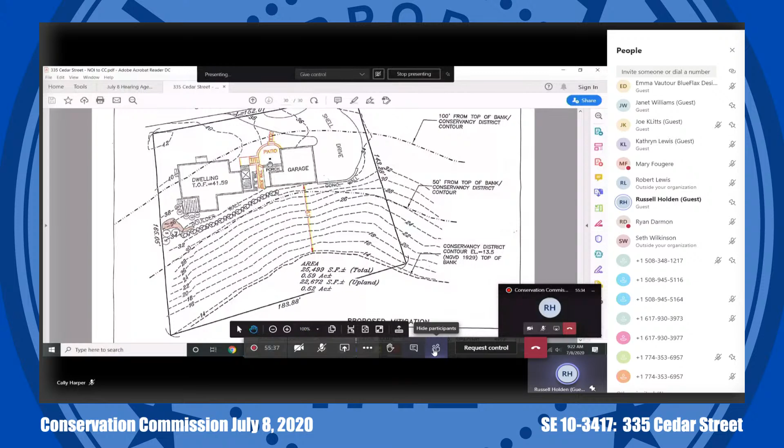Janet, I have a question. Okay, go ahead, Bob. There's a drain within the cobblestone patio, where does that drain out? It goes to a dry well. I'm not sure exactly where, but I've been told that it goes to a dry well within the patio. Yes.

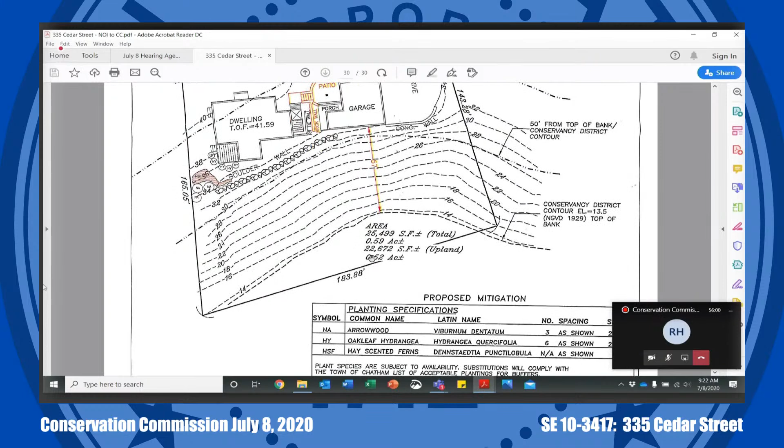Okay, and I noticed some viburnum on the bank, on the 50-foot bank. Is there any way you could add more viburnum to that area? That's what we were just talking about - as far as this notice of intent, are you saying below the boulders or on top of the boulders? No, below the boulders on the bank itself. That's what I proposed, but I was told not to include that in the mitigation.

Okay, that's the previous restoration area. We're trying to stay away from the previous because we don't have those plans. Okay, terrific. We'll hope that the viburnum will continue to grow and will eventually fill in - if it's anything like the viburnum I have here, it will spread and grow and fill that in. That has grown a lot since this fall. Good enough, thank you.

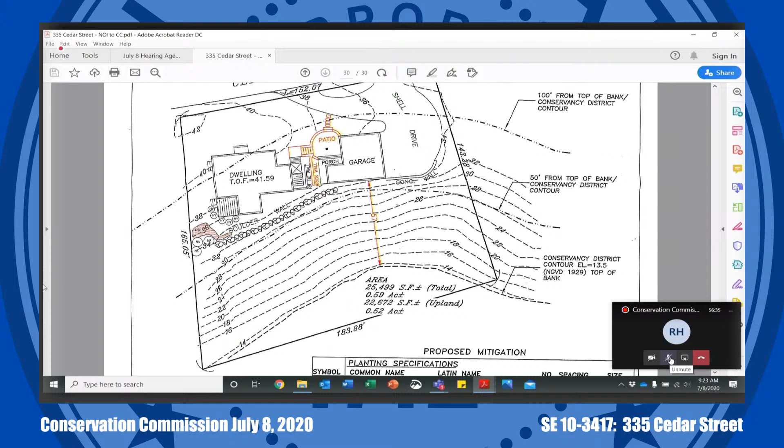Other questions, comments, suggestions? Everybody comfortable with sending this to the work session for an order of conditions? Yes. Okay, yay, good to hear you, Joe.

So we have a motion, same as before: continue to the August 5th work session to review an order of conditions. Bob Lewis moved to go to the August 5th work session for orders of conditions. Is there a second? Clark, second. Roll call vote to continue to August 5th. Commissioner Klitts? Yes. Mr. Lewis? Aye. Commissioner Delvecchio? Aye. Mr. Clark? Aye. Chair votes aye. Let's continue to the August 5th work session.

Thank you, Russ. Thank you very much.

Okay, next item on the agenda is 74 and 77 Sears Point, Patrick Brogan and Patricia Black, SE 10-3418, proposed construction of new driveway to existing guest house, implementation of a land management plan for invasive species control at 74 and 77 Sears Point, Assessor's Map 11A, parcels 10B and 11.

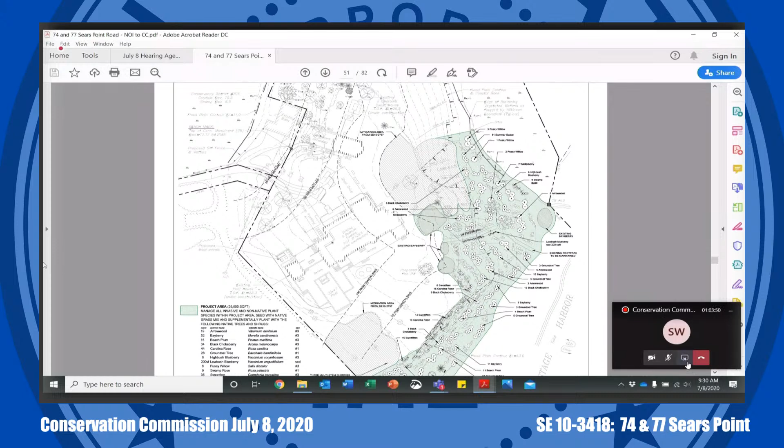When these black cherries and oaks grow up and get into a very unstable form, they are subject to wind throw. Black cherries in particular tend to grow more laterally in these high salt areas, which shades more of the ground cover, eliminating a lot of other growth that would otherwise be in that location.

Black cherry in particular puts out a more dense root system, helping anchor it to the ground and prevent wind throw. Also, you're just reducing the overall sail effect of the tree, lowering its height.

We would propose to manage it at about 8 to 10 feet, which is a very stable height and allows considerable growth and development of fruiting bodies, and should ultimately allow that plant to last much longer in this high energy, high wind, high salt spray location.

So to be clear, we'll get this corrected and sent over later today. It's 6 to 8 black cherries only that are proposed to be coppiced, because we've identified some major structural deficiencies with those 6 to 8 trees—not 16. We'll correct that.

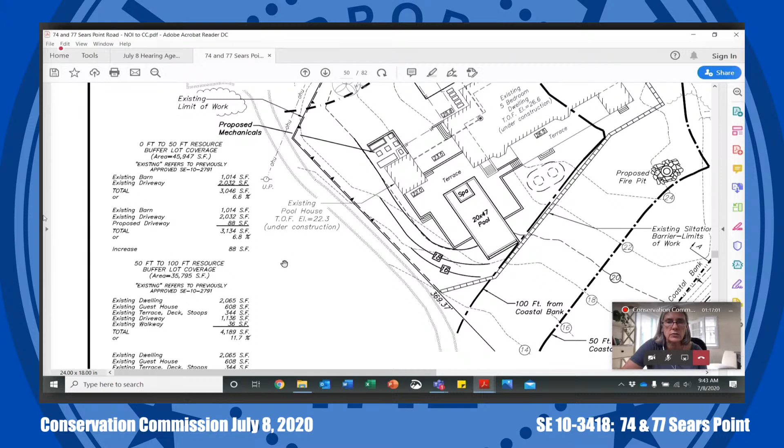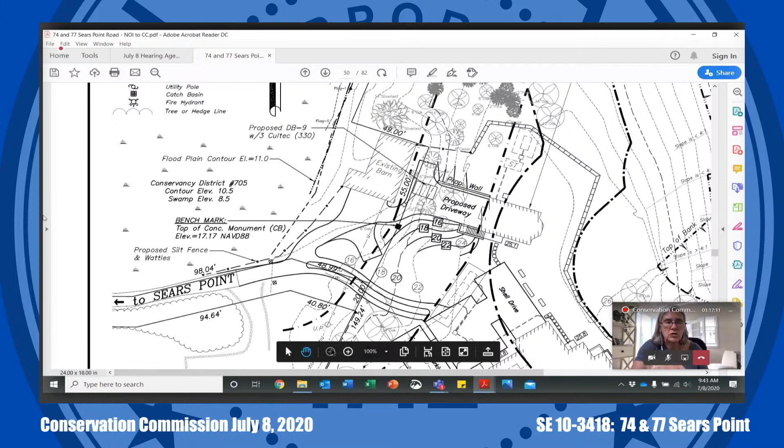Okay, all right, great. So the 88 square feet, Callie can you scroll up a little bit? The 88 square feet of increase in the NDZ is where the driveway, up a little bit, yeah, the driveway crosses from the spur off the existing barn and comes up to the house. Is that right? Yes, yep. Okay, and then an additional 1,800 square feet in the 50 to 100. Is that?

So altogether, it's about 1,900 square feet of impervious surface.

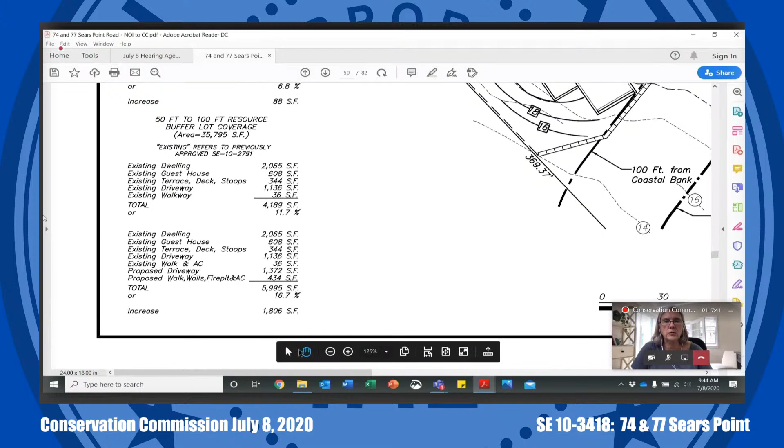I'm interested - you said the proposed driveway is going to be pervious, but I noted in the work protocol that it's calling for two underlayment layers of asphalt. I honestly can't say I've seen this before, so I'm wondering what that is and what impact it has on the ability of the driveway to act in a pervious manner and filter stormwater.

I will check with the landscape architect. I know we proposed that for the main driveway because it's relatively steep. I don't know why it was called out for this one, but I will find that out.

That was one of my questions, because I don't have the original plan, and the original driveway isn't quite available to me easily. So that method being proposed - is it approved for the main driveway? Yes, two courses of asphalt are not proposed over... that wasn't what was proposed for the entire main driveway. It's just the area where the grass strip goes up the hill. Everything else, I believe, was - but I'll confirm that.

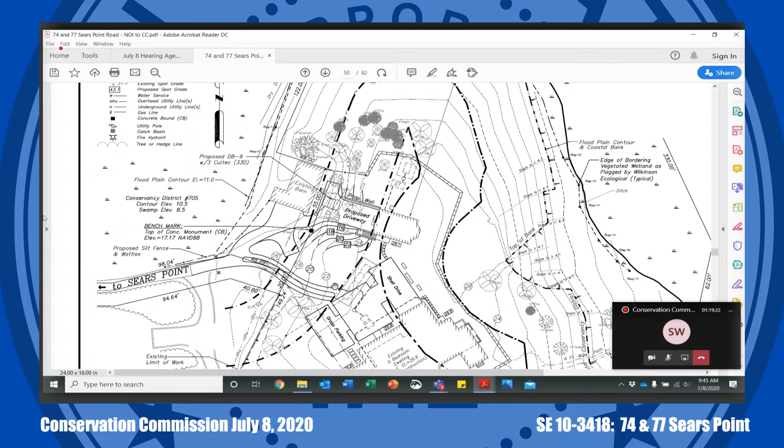Other questions from other folks while I'm double checking my notes here? Other commissioners, questions, comments? Bob Rawls.

Yes, a bunch of questions, but I think they should probably wait for the on-site. Is the barn being removed? No, it is not.

And whenever we finally figure out which parts of the driveway have this asphalt and which parts don't, I think it should be marked on the site plan so we understand that.

I have a bunch of questions about the grading required to put in a drive from the barn to the guest house, because at the moment there are steps and a retaining wall there since the slope is pretty significant - but that's probably best answered on site when we're standing there looking at it.

Can you clarify, David, the trees that are proposed for removal? I know you said there are 5. They are not marked. So can we have them flagged in the field? Can we have the trees proposed to be removed marked on the plan?

Yes. And I guess a tree inventory is what I'm asking for - a list of the trees, their size, their species - so that it's clear which trees are coming out. I can do that.

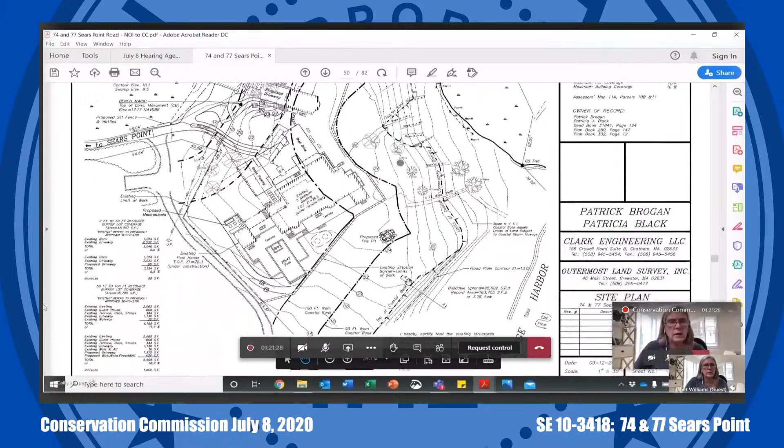Callie, if you can go back to the site plan please. David, you provided 4 profiles, and only one of them is shown on the main site plan - that's AA. If you scroll down, or maybe up, where you get to the 4 profiles shown, the 4 cross sections, AA through DD - there we go. I was trying to understand.

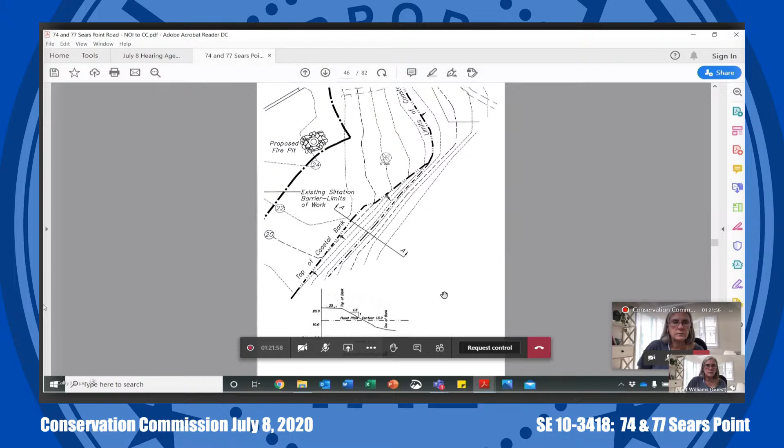So AA is marked on the site plan, that's the coastal bank just below the proposed fire pit, and I can see the slope there. But the other 3 are not - their locations aren't shown on the plan, so it was a little hard to tell what they were. Well, I did provide location sketches along with the profiles - I figured that was sufficient.

Well, this one I can tell, BB, a bit, because it's showing the proposed fire pit. So this is just showing how the slope of the bank begins to level off as you move in an eastward direction away from Stage Harbor and over toward the wetland.

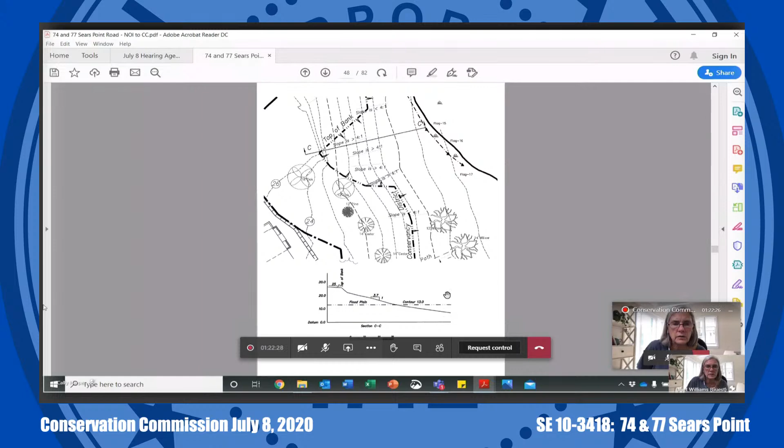Okay, I see that. Then Callie, can you go to the next one, just so I'm clear? This is CC - that's off the east side of the main dwelling, heading toward the ditch. Okay, and the last one, Callie.

That is to the east of the guest house, again heading towards the ditch. Okay, all right - I just was confused, I wasn't sure about where those last 2 were actually located. But I can easily add those to the site plan.

Thank you - you've also asked for the trees to be marked. All right, other questions, comments?

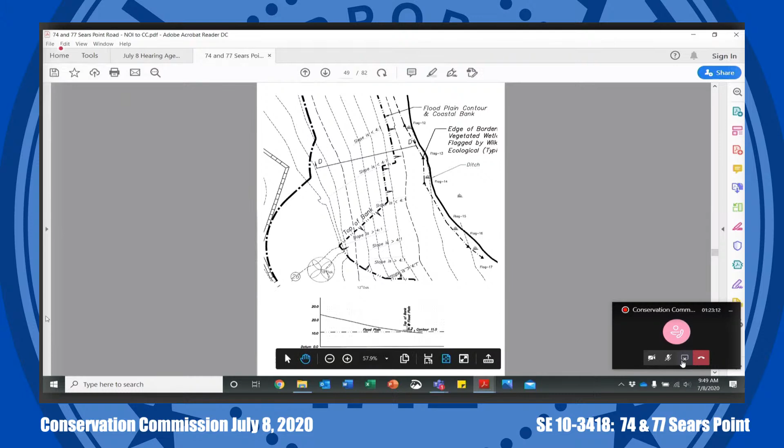So I have a question for both of you. Seth, you mentioned in your narrative that part of the reason this project is being done is because of significant erosion on the coastal bank. Yet the project narrative also says there's no visible sign of erosion. From my familiarity with the bank, I haven't noticed any significant erosion.

Is there areas of the coastal bank where erosion is more of a problem? Yes, far to the east, on the other side of the creek, and along the neighbor property to the east near the rock revetment, there's some active erosion. What we're trying to communicate in the land management plan is that the deeper rooted native species proposed here will do a much better job preventing erosion. We don't feel structural elements are needed, simply a native plant community, given the slopes and the fact that most of the bank is presently stable.

We're trying to prevent that active erosion from encroaching further onto the property. So it's largely preventative in addressing erosion problems—get the deep roots in now rather than having to use something like fiber rolls or sand-filled envelopes later. Okay, got it.

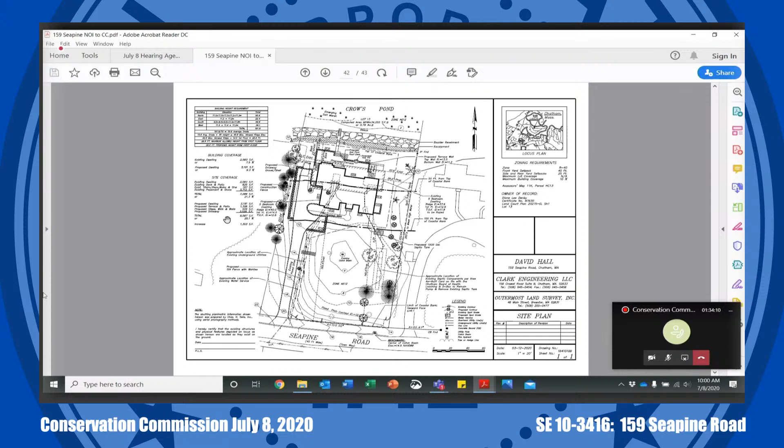Madam Chair, we also have Emma Vauteur of Blue Flax Design, who's working on this project. I don't know if you want to hear from her at this point or not. Sure, let's get a full picture of the proposal, and then we can.

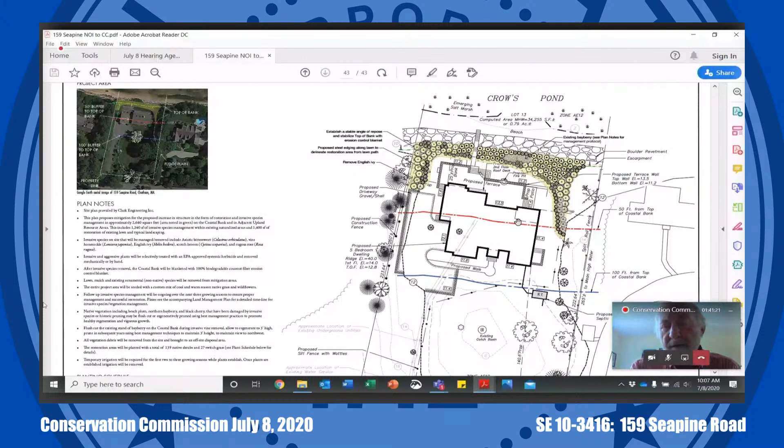Well, to some degree, but we have to be- it'd be good to be a little more specific about where that view corridor or desired view corridor is by showing it somehow, I guess, on your plan, on your landscape plan. I think there should be some indication of what you're trying to protect, preserve in terms of the corridor, so that there's no confusion about it. We can certainly show that on the plan.

I was basing the specific note on previous feedback. We heard before that creating a view corridor can cause concerns in the future if there's a future change in property ownership. But I'm happy to show it on the plan. That's true generally, but this particular location, this site has no existing trees in the area and none are proposed. So it's not the kind of view situation where you're dealing with pruning trees.

You're proposing pretty much everything I see as relatively low growing. Is that right? We do have some taller vegetation, but it won't need to be pruned in the future. Everything will be naturalized. Okay. So if we do show a view corridor on the plan, it will not indicate future pruning except for on that stand of bayberry.

But we can, I think it makes sense to put it on the plan and verify that. Great, so we will do that. Okay, sorry about Bob jumping in. Go ahead. No, that's fine.

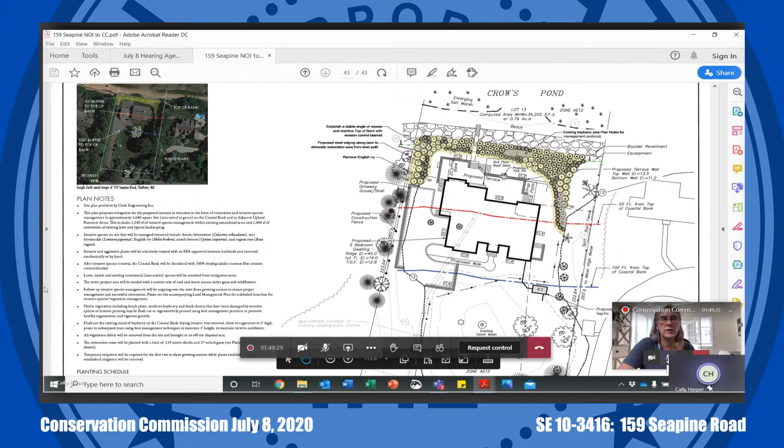Emma, real quick, if you're going to be doing a revision to your plan to include the view corridor, is it possible to just put a call out to that area that Bob Rawls talked about earlier, where there's already existing natives there? Just so it's on the approved plan and it doesn't come up later, two years down the road. Just some sort of call out. Yep.

I have a question for David. Is the proposed terrace dry laid? I don't have an answer for you on that, but I will find out at the next meeting.

And how high, so there's a retaining, not a retaining, there's a wall that surrounds, that's proposed around the terrace. And that continues into becoming a retaining wall along the driveway and in front of the parking areas. Is that what I'm seeing there? It's not marked as retaining. They're not connected. There's a gap, but then yes, there is a retaining wall along the westerly property line. Of the same dimension as the wall around the terrace, or?

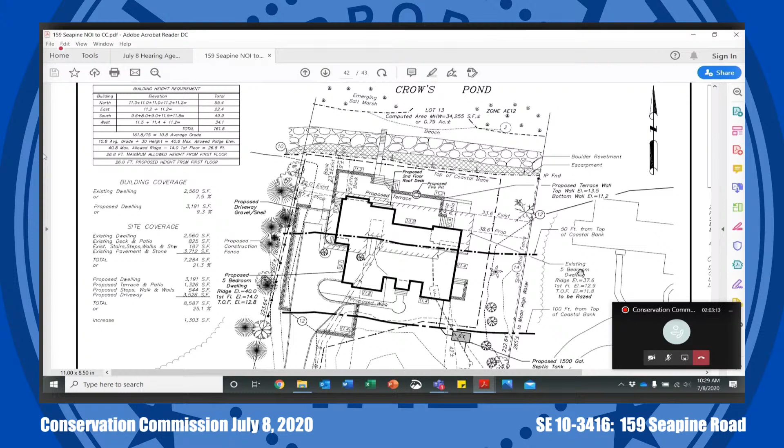Madam Chair, I had another question. Yes, Tom, go ahead. All this conversation about our favorite little pit out here has caused me to wonder, was this what you referred to as a swale? Given all the water runoff that would have happened naturally from the driveway and the surrounding areas, why isn't this swale actually a wetland that somebody has improperly drained in order to defeat it from existing? Tell me why that's wrong.

There's no evidence of that. It's somebody's yard at this point. It's been somebody's yard for decades, long before the adoption of the Wetlands Protection Act. I expect groundwater is pretty close to the bottom of that swale, but I didn't see any evidence of any wetland vegetation, which would still exist if it was truly wet.

Well, my point was that, I think, I don't remember whether it was Bob or Joe that mentioned it, but or perhaps the chair, was because of the existing catch basin in the bottom. In essence, it's drained it out, and for lack of a better term, it's dehydrated the wetlands area, dried it out, so it can't exist.

I can't see that happening in this instance. It's probably elevation 5 down there. You can see the 6-foot contour. Yes, I can. So I would say that catch basin is probably somewhere around elevation 5. I expect groundwater to be around elevation 2, 2.5 in this location. So like I said before, it is close, but I didn't see any wetland vegetation when I was out there. And certainly it would have been noticeable.

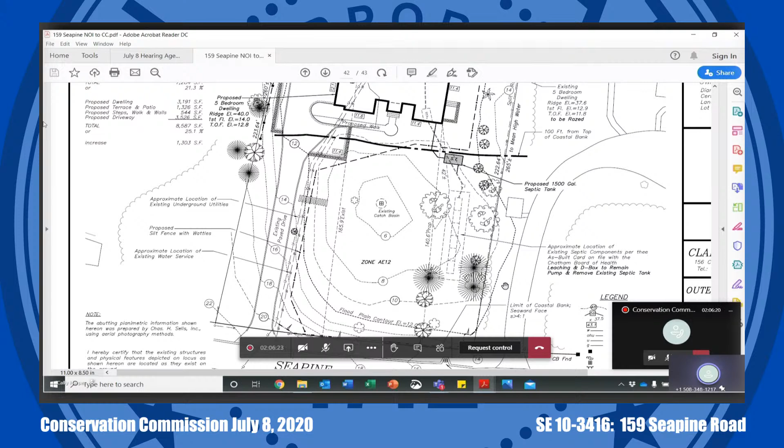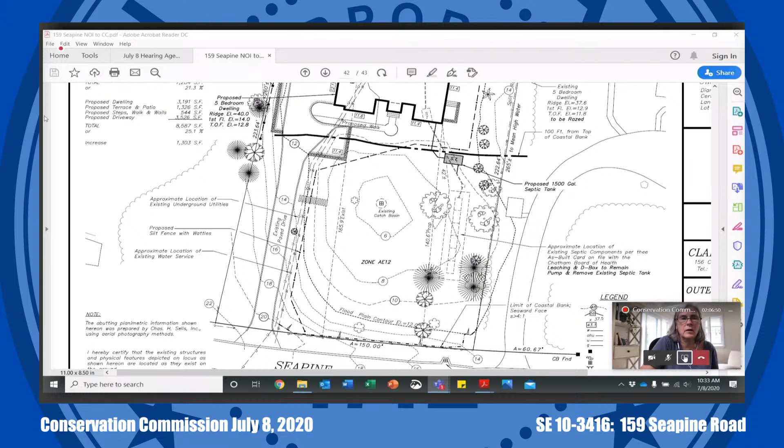Well, I think the companion question to the issue you're raising is, do we know when that catch basin was installed? I suppose some aerials would give us some evidence of that and what may have been existing before. But if it's pre-adoption of the Wetlands Protection Act, then we probably don't have much to say about it.

No, I agree, you make a very good point. I'm just thinking, when I was practicing back in the Stone Age, we used to collect aerial photographs on sites just to look at their history and get an idea of what's been done to them over time. And that's kind of the thought that popped into my mind as I was listening to various descriptions of this basin area, or swale as it's been referred to.

Yeah, we have some, not perfect, but some access through Google Earth to historical imagery that might be out there. We can take a look at that. So we can do that. We don't need to ask them to do that. We can, right, Cally? We can maybe do that. That's correct. Yeah, we have whatever Google Earth has on its historical imagery. We can pull that up. Yeah, I'm sure that would be adequate.

Okay, we'll do that. This is Bob Rawls. I assume that this is not on any current official maps indicating that it is a wetland. Otherwise, you would have called it out, I assume, David. Yes, we would have, yes.

Yeah, well, Madam Chair, Bill Riley. Yes, Bill. I think the important thing to remember here is that before 2014, the floodplain was lower, and I don't think there's any evidence that stormwater, saltwater stormwater, ever entered the property. And so I appreciate Tom's concerns, and the fact that there's no substrate that would support a wetland, but I don't think the concern is particularly reasonable, candidly. I also wanted to note that we're going to the Zoning Board of Appeals on the 23rd, and we're hoping, assuming this is continued, that it would be continued to the 22nd.